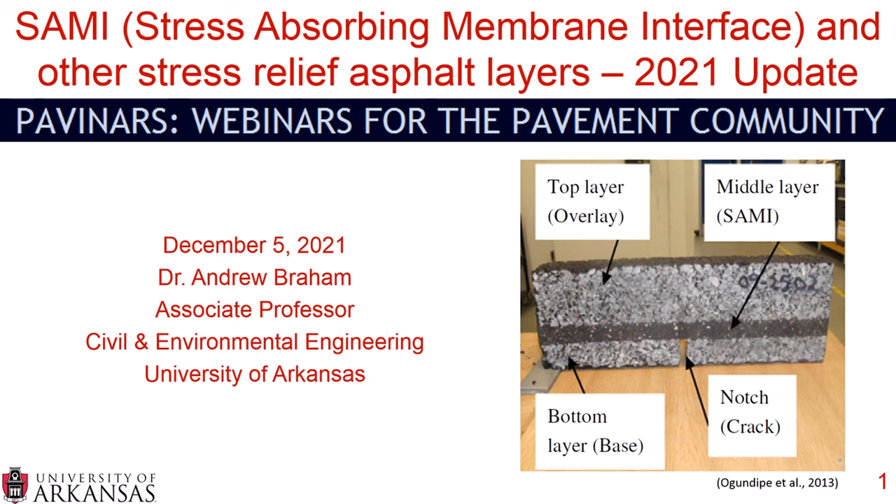My name is Andrew Braham, and today we're going to talk about SAMI, or Stress Absorbing Membrane Interfaces, and Other Stress Relief Asphalt Layers. This is the 2021 update. The original SAMI Pavinar was held and recorded on October 1st, 2013, and posted on YouTube on September 6th, 2018. It currently has over 1,000 views, so an update is warranted.

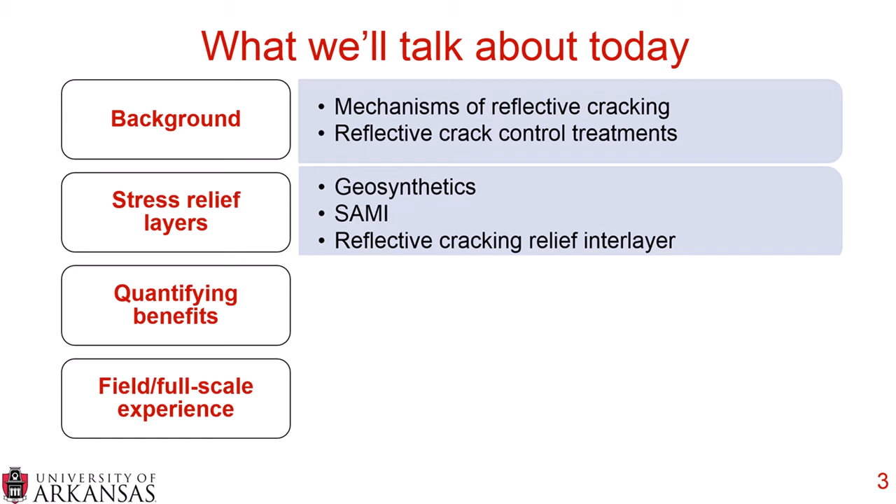Today we'll cover the background of SAMI and other stress relief interlayers, including mechanisms of reflective cracking and basic introductions to reflective crack control treatments. We'll dive deeper into different types of stress relief layers, including geosynthetics, SAMIs, and reflective cracking relief interlayers. We'll spend time quantifying the benefits of these stress relief asphalt layers, and hone in on a Louisiana report that dug deep into predicted service life and an economic analysis of various stress relief layers.

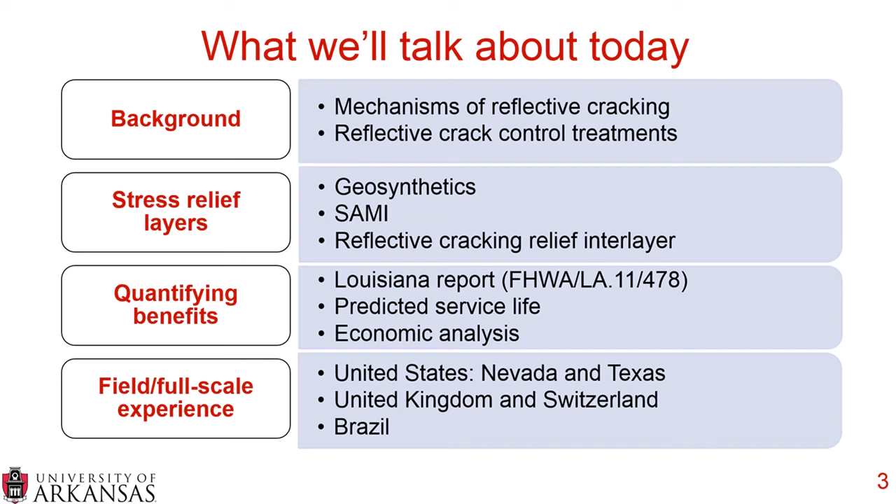Then finally, we're going to end with some field and full-scale experiences. We'll look at two case studies in the United States, one from Nevada and one from Texas. We'll look at two case studies from Europe, one from the United Kingdom and one from Switzerland. And then we'll look at some work that's been done in Brazil.

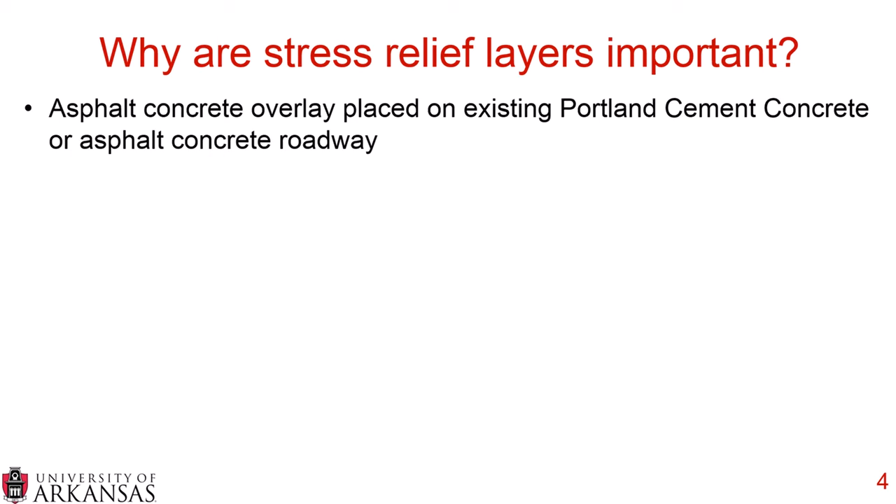So let's start by asking the question: why are stress relief layers important? Well, when an asphalt concrete overlay is placed on an existing Portland cement concrete pavement or an asphalt concrete roadway, there is a possibility for reflective cracking. And that's because the existing pavement often has either cracks or joints in it.

You can see here this picture from Eshan Dave, taken at the University of Illinois. You can see a Portland cement concrete pavement with a joint in the middle, and an asphalt concrete overlay was placed on top. There's a possibility that joint will cause a reflective crack to form, and these cracks reflect into the new overlay.

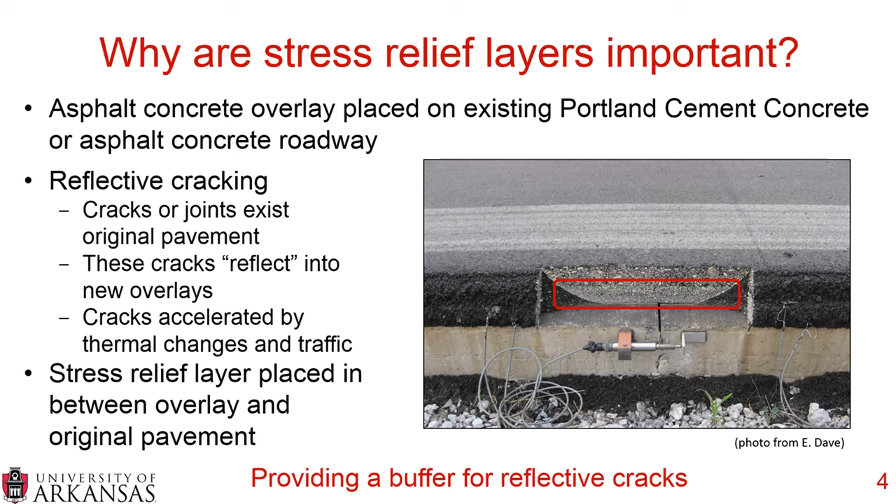So that existing joint, when wheel loads go over it and when there are thermal changes, will start moving up into the asphalt overlay, and eventually you'll have a crack on top of where that existing joint is. In this picture, you can also see in the red box a different type of asphalt concrete mixture. That's because this is a stress relief layer placed between the overlay and the original pavement, with the asphalt concrete overlay on top. This stress relief interlayer provides a buffer for reflective cracks.

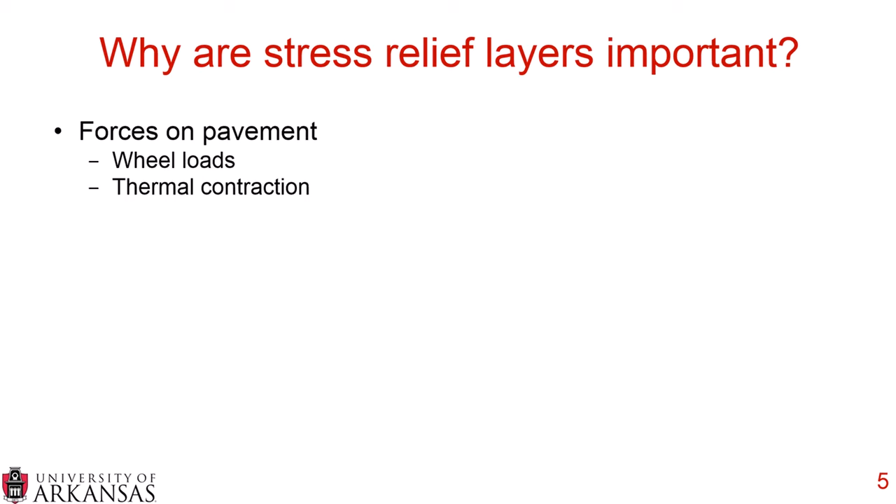So when we focus on the pavement specifically, we can zone in and think about how wheel loads and thermal contraction influence these cracks. As a wheel goes over a pavement, there are bending and shear stresses that occur. There is also a thermal contraction that causes a tensile-type failure. You can see by these arrows, the thermal contractions cause the pavement to want to open because the pavement shrinks, and the wheel loads cause the pavement to go up and down, causing bending and shear stresses.

There's also some vertical movement due to thermal contraction and some horizontal movement due to wheel loads, but in general this is the simplified story of what's going on under loads.

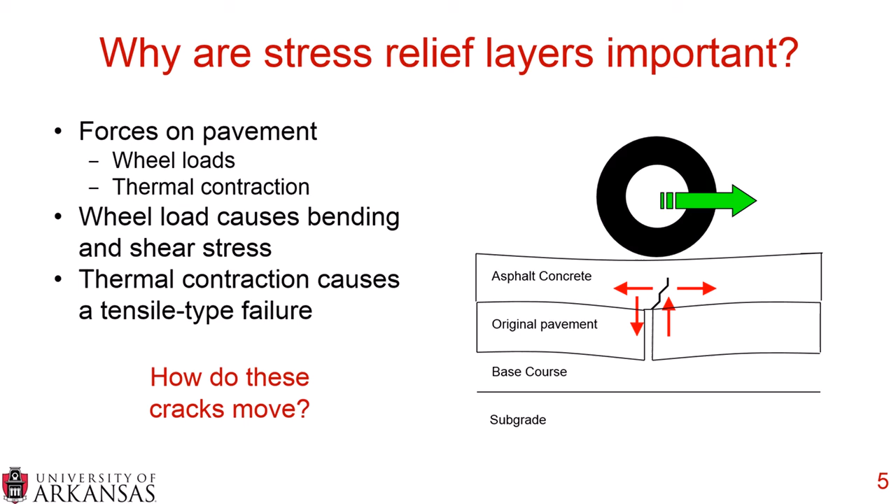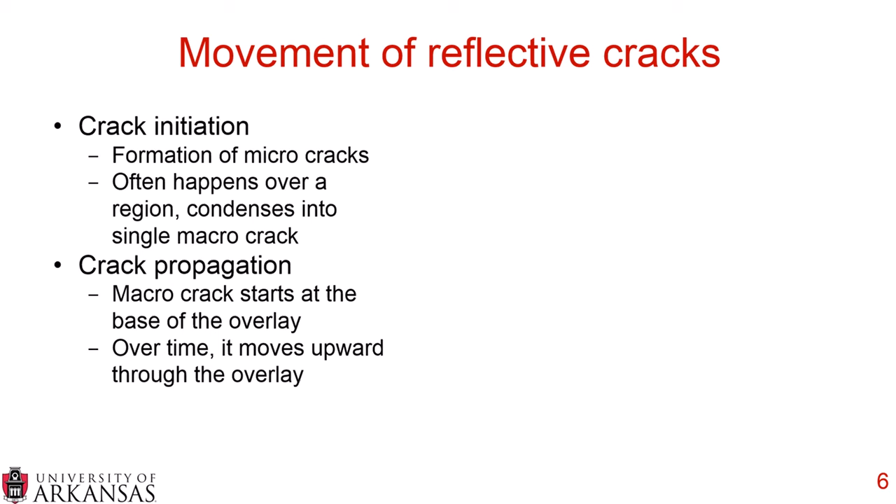It's important to understand how these cracks reflecting through the asphalt concrete layer move. It starts with crack initiation, which is the formation of microcracks. When we think about microcracks, we want to think about a region—there are many microcracks over a region, and over time these condense into a single macro crack. Once you have that macro crack, you start propagating it. The macro crack starts at the base of the overlay in reflective cracking, and over time it moves upward through the overlay.

Now there are various experiments and analysis techniques that dig into this concept of crack initiation, crack propagation, and crack movement. This includes Paris's law, pseudo work, fracture energy, tensile strength energy, strain energy release rate, flexibility index, cohesive softening, and power release rate.

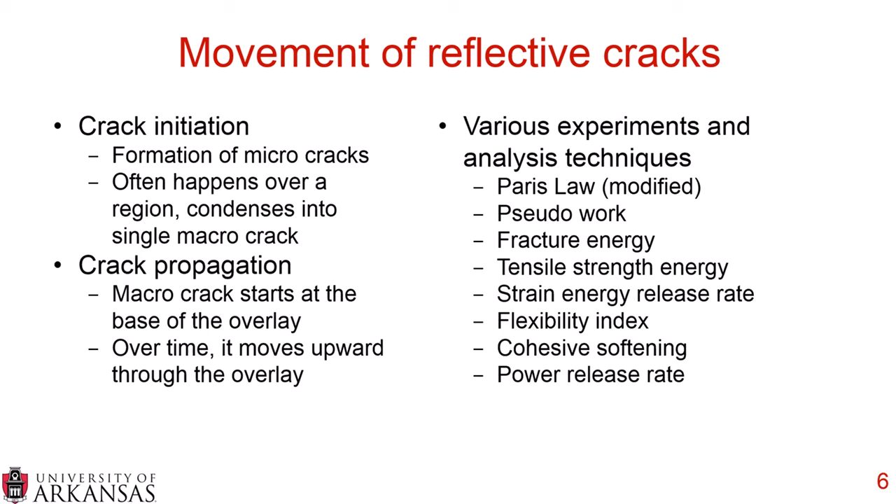The details behind these various experiments and analysis techniques are beyond the scope of this webinar, but if you're interested in these concepts, I encourage you to take a look at a white paper called 'Fatigue or Not Fatigue, That Is the Question.' If you search for this on ResearchGate, it is available for download free of charge.

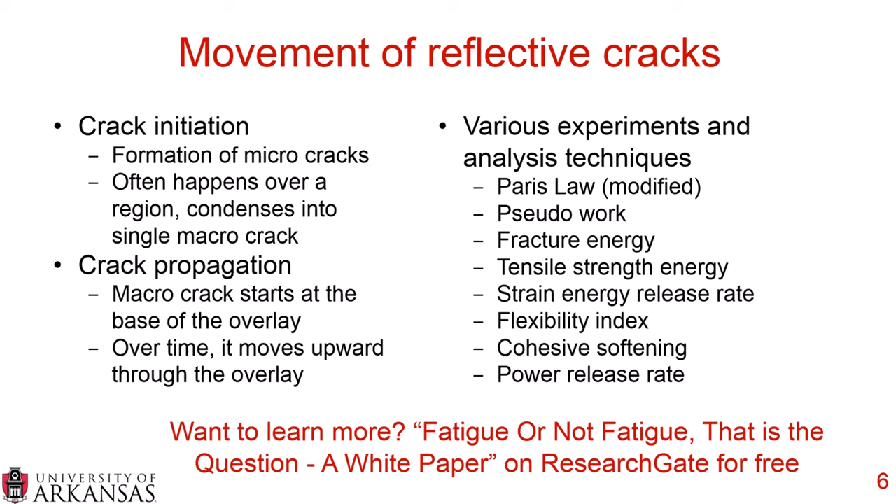Now, what sort of ways have we developed to try and either eliminate or at least slow down the movement of these reflective cracks? Well, we have geosynthetics, which are thin, flexible sheets of synthetic polymer. They can be polypropylene, fiberglass, or nylon. You have either woven or non-woven varieties, including a fiberglass mesh and a non-woven matrix, about a half inch by half inch wide. So you can have either a woven mat or a mesh type configuration with geosynthetics.

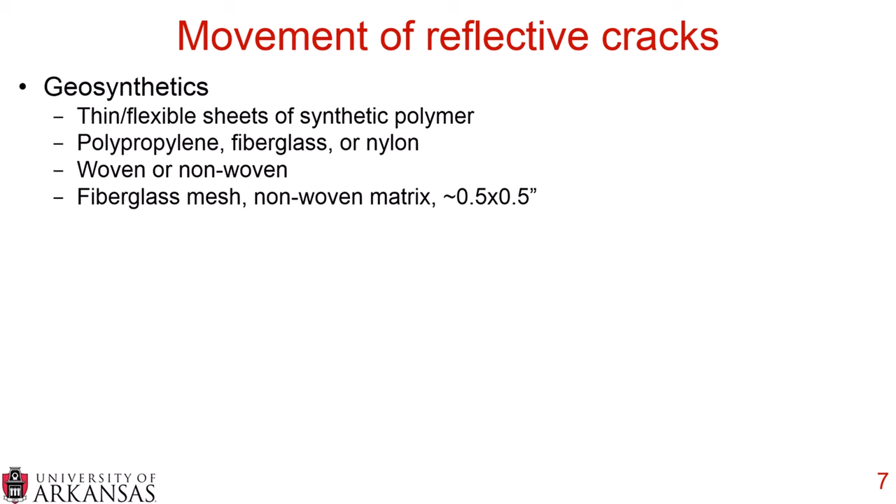Stress absorbing membrane interfaces, or SAMIs, are usually either asphalt emulsion or hot applied asphalt binder placed on the road, and you can potentially modify the asphalt binder with SBS, styrene butadiene styrene, ground tire rubber, or other modification techniques. You may use fiber between the layers of asphalt emulsion or hot applied asphalt binder, and you place coarse aggregate chips on top.

A reflective cracking relief interlayer can be fine graded asphalt concrete, which can be modified with polymer if desired. There are different names for these interlayers. Some articles use the term SAMI, which I believe is not quite technically correct, but you'll also see crack attenuating mixtures, stress relief asphalt mixtures, and a proprietary product developed years ago called Strata. These are all types of reflective crack relief interlayers. But remember, all of these materials - geosynthetics, SAMIs, and reflective crack relief interlayers - are designed to be placed on top of an existing pavement and underneath an overlay in order to eliminate or slow down reflective cracking. The next section will dive deeper into these treatments. This is just a very brief overview.

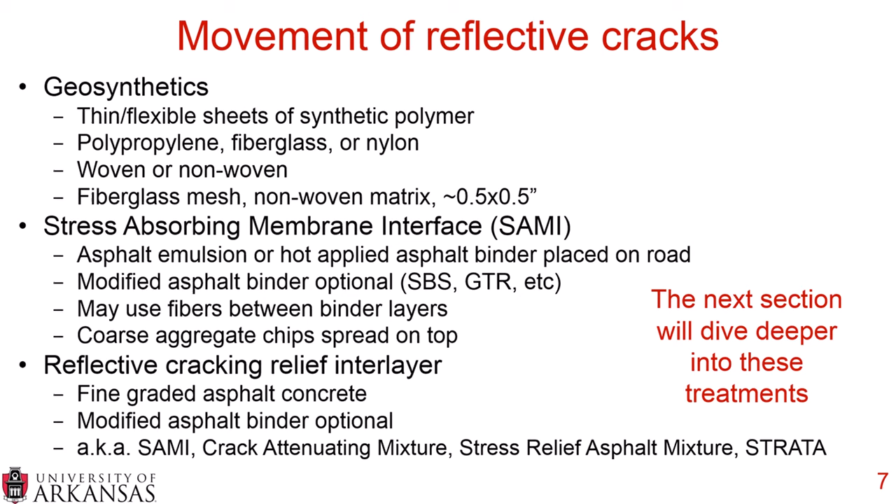So let's move on to digging deeper into each type of stress relief layer, and let's start with geosynthetics.

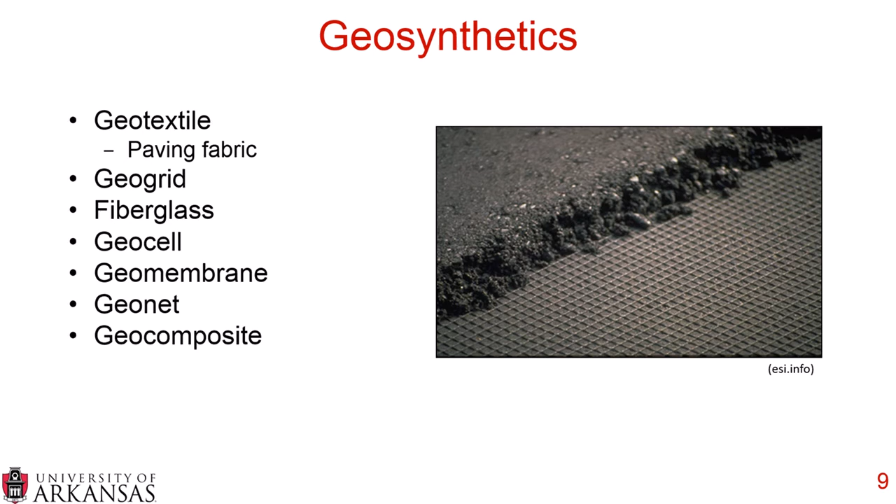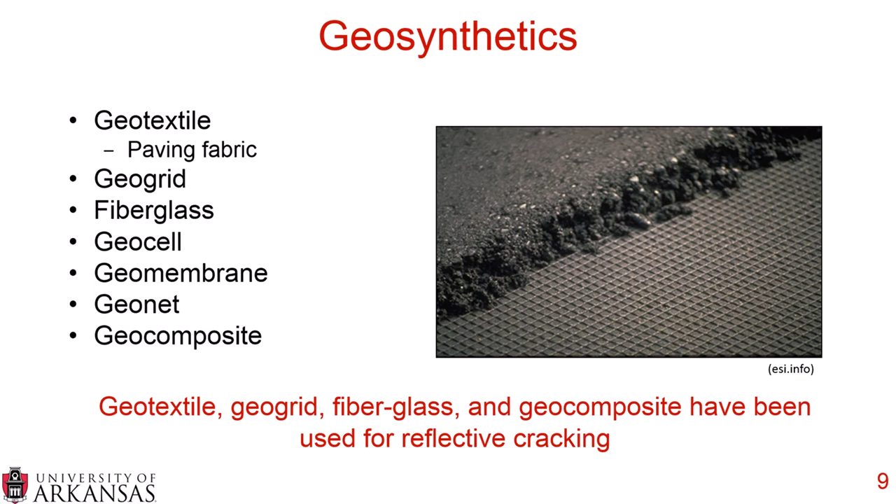Geosynthetics can be geotextiles, which is a paving fabric. It can be geogrids, which you can see on the right. You can also have fiberglass material or geocells. You have geomembranes, geonets, and geocomposites. So there's a whole bunch of different types of geosynthetics out there. And when we think specifically of pavements, geotextiles, geogrids, fiberglass, and geocomposites have been used for reflective cracking, so as you're reviewing literature you'll probably see these types mentioned.

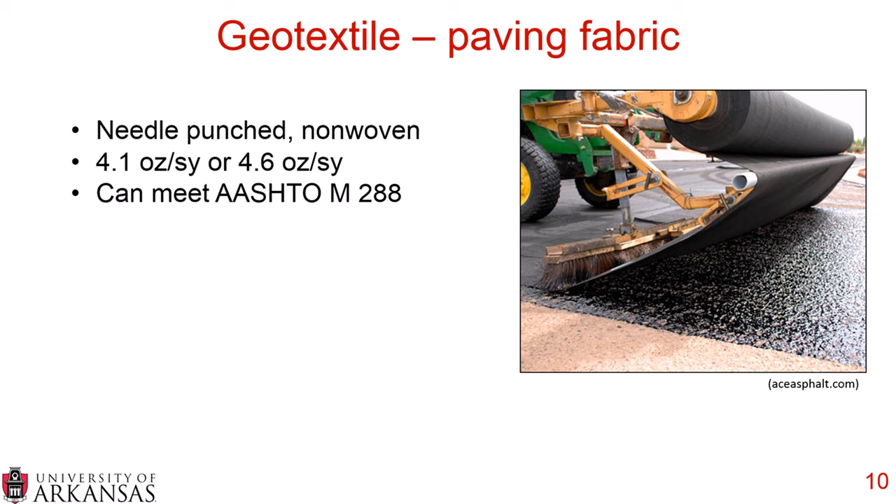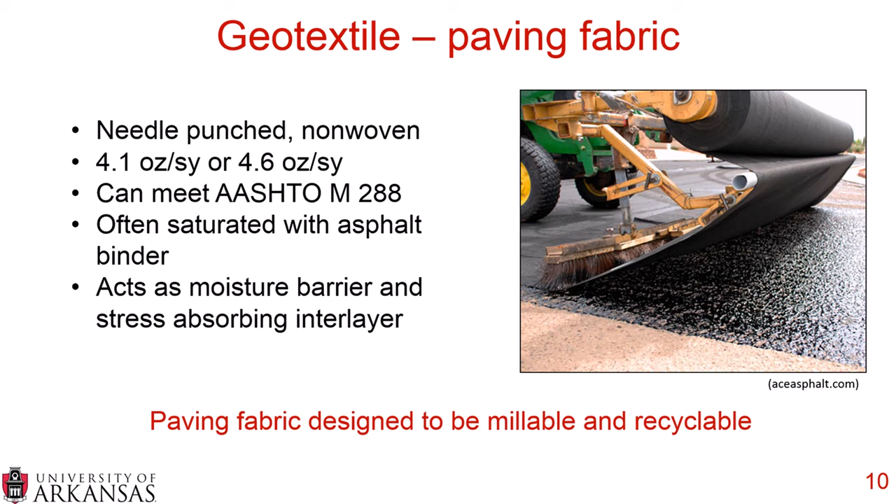For example, for paving fabrics, this is needle punched and non-woven. It's 4.1 ounces per square yard or 4.6 ounces per square yard, depending on the thickness of the fabric you're laying, and you want it to meet AASHTO M288. You can see here it's being placed on an asphalt binder, and it's often saturated with asphalt binder. This not only allows it to be a stress absorbing interlayer, but with this absorption it can also act as a moisture barrier. Now, one common question about this material is, can you mill it later, and can it be recycled into future mixes as reclaimed asphalt pavement? There are paving fabrics specifically designed to be millable and recyclable, but that is something you definitely want to investigate before placing any particular brand.

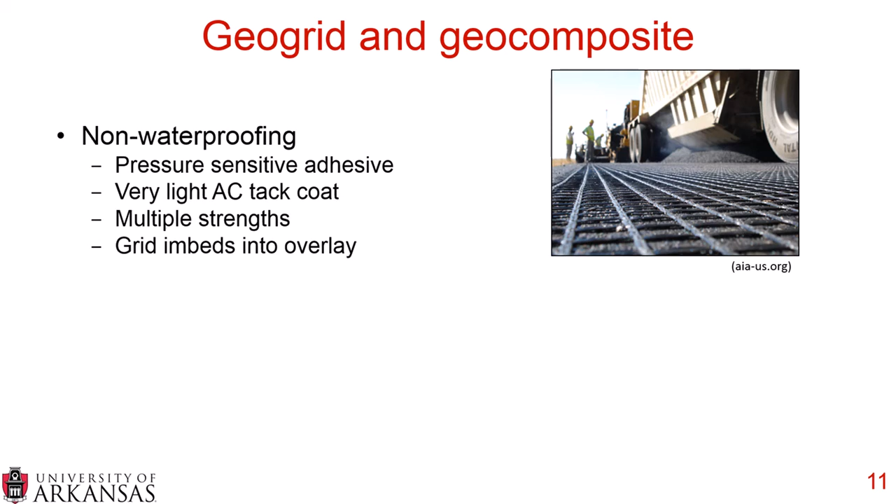Now, moving to geogrids and geocomposites, these are no longer a fabric - this is more of a grid type material. These are non-waterproofing, because they just use a pressure-sensitive adhesive and a very light asphalt concrete or asphalt cement tack coat. You can have multiple strengths of geogrids and geocomposites, and the grid embeds into the overlay. So you can see in this picture, you're placing hot mix asphalt on top of the geogrid, and that hot mix asphalt will go down into those cells and embed itself into the geogrid. So those are all non-waterproofing options.

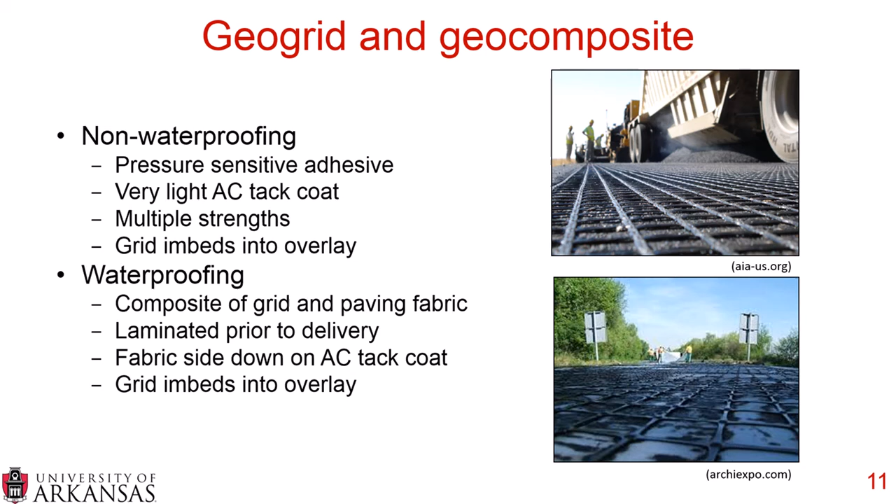For waterproofing options, you can have a composite of a grid and a paving fabric, generally laminated prior to delivery. You want to make sure to place the fabric side down on the asphalt cement tack coat, and then the grid again embeds itself into an overlay. So you can imagine this open geogrid and geocomposite really isn't waterproof because it has these large cells in it. So if you do want the waterproofing benefits, you want to make sure to use a paving fabric in addition to the geogrid.

Now, SAMIs, stress absorbing membrane interfaces - you generally place some sort of seal coat binder down, and this is generally polymer modified. As I mentioned, this can be hot applied asphalt binder or asphalt emulsion. You can use ground tire rubber, you can use SBS polymer, and you can also place fibers in between binder layers. So you can put a thinner layer of either hot applied asphalt binder or asphalt emulsion down, then place some fiber, and then place another layer of asphalt binder or asphalt emulsion. There's various ways to modify the seal coat binder. You then place your coarse aggregate chips, and essentially this turns into a chip seal.

You put a pneumatic tire roller over it, orient the particles, sweep it, and let it sit for probably about a week to make sure all the water has left the system. Then you place your overlay. These SAMIs retard crack propagation and also improve the tensile strength at the bottom of the overlay.

Earlier I mentioned that you can have horizontal stresses at the bottom of a pavement layer due to wheel loads, and that is because of a bending stress. Those bending stresses create tensile stresses at the bottom of your layer, and these SAMIs can help improve that tensile strength because it's a very rich layer.

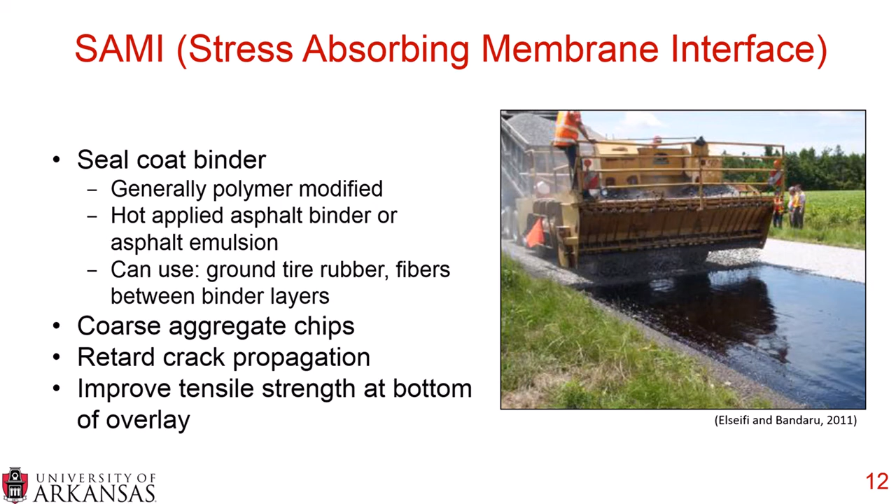Finally, the third type is a reflective cracking relief interlayer. This is a dense, fine aggregate mixture layer that may or may not be polymer modified. It's placed on top of a deteriorated pavement, and then you place your hot mix asphalt overlay. It protects the pavement structure from moisture damage and delays reflective cracking. When we say fine aggregate mixture, we usually mean greater than 98% passing the 3/8 sieve, which is the 9.5 millimeter sieve — so almost a sand mixture, but very fine.

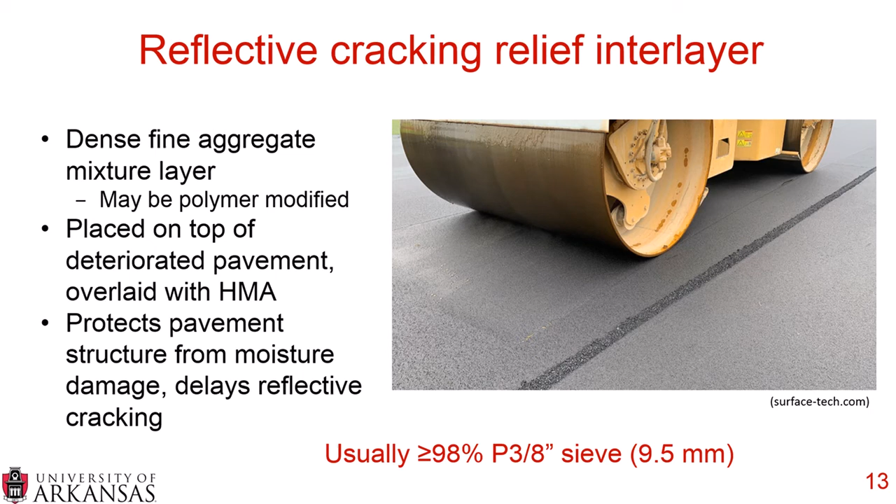Now that we've had a pretty in-depth introduction to the stress relief layers, we're going to go over some of the benefits, starting with a very nice study from Louisiana.

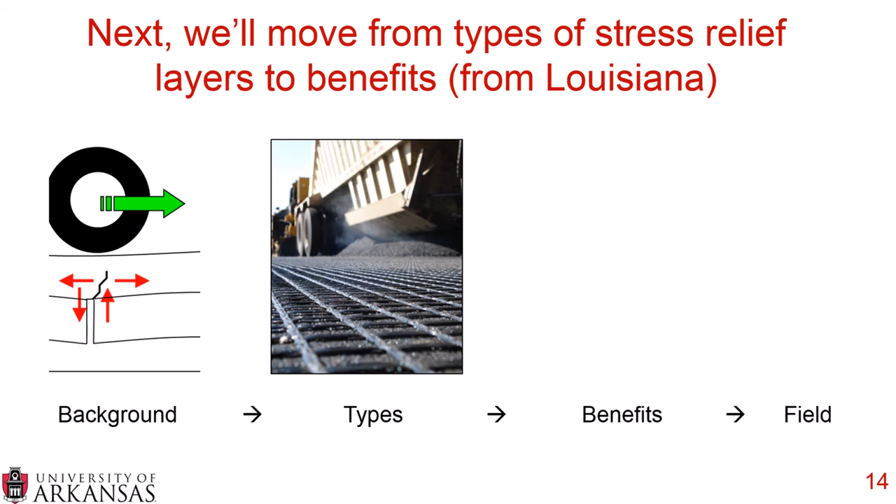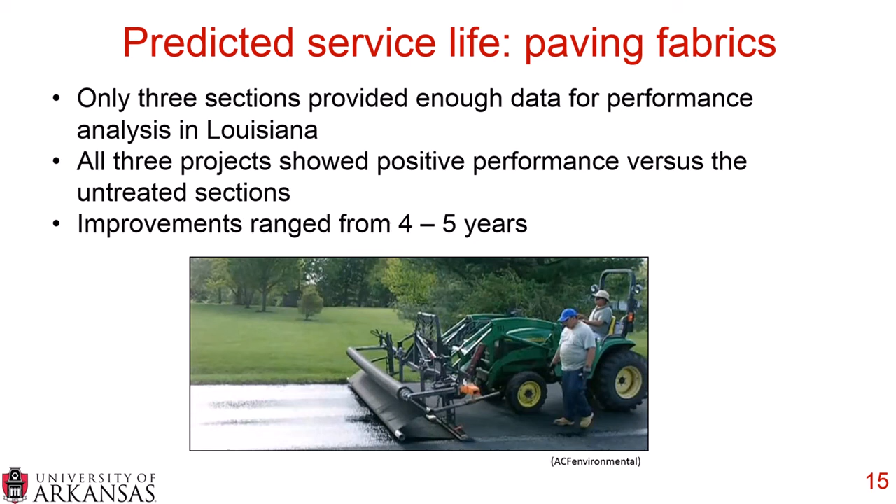They first looked at paving fabrics, and when predicting the service life of various paving fabrics, they looked at 3 sections, because only 3 sections provided enough data for performance analysis in this Louisiana study. They found that all 3 projects showed positive performance versus the untreated sections, with improvements ranging from delaying reflective cracking anywhere from 4 to 5 years.

They also looked at fiberglass grids, placed in 2 different configurations. One was a complete road system, where you place the fiberglass grid across the entire existing pavement surface area, covering all of the existing pavement. You can also place this only in specific locations, called a strip application, where you just place the grid over where cracks exist in the existing pavement.

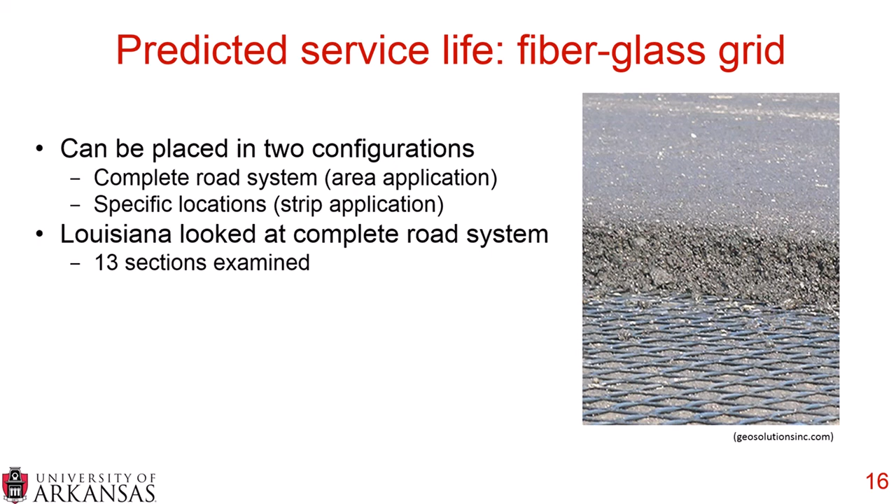The Louisiana study only looked at the complete road system, examining 13 different sections. They found that 8 of those 13 sections showed the untreated section outperforming the treated section anywhere from 0 to 7 years, and 5 sections showed the grid outperforming the untreated section by 1 to 6 years. So some untreated sections outperformed the grid section by up to 7 years, while some grid sections outperformed untreated sections by up to 6 years, and some showed no difference — a pretty big mixed bag.

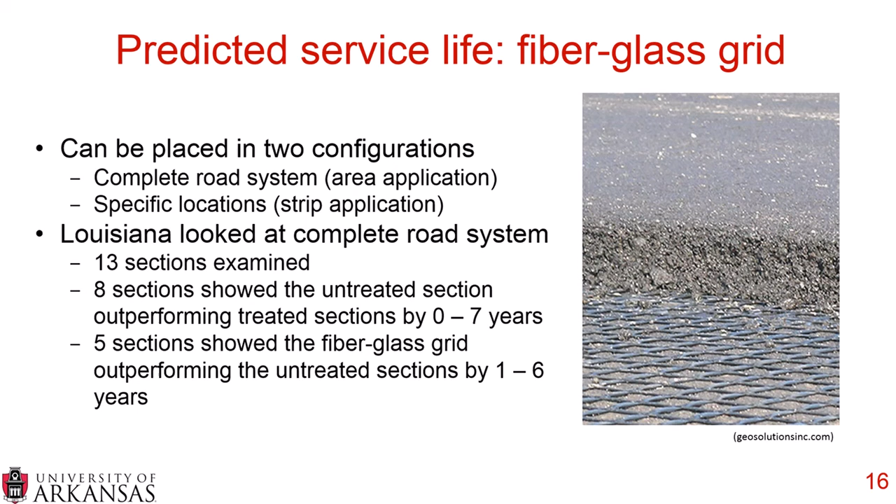So this is really a mixed study, and if you're interested in fiberglass grids, I really encourage you to take a look at this report because there's a lot of interesting details and discussion about this in particular.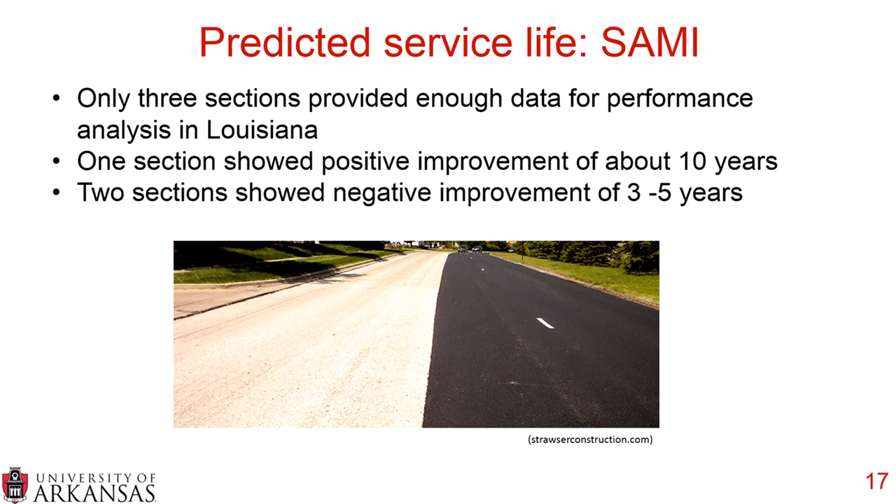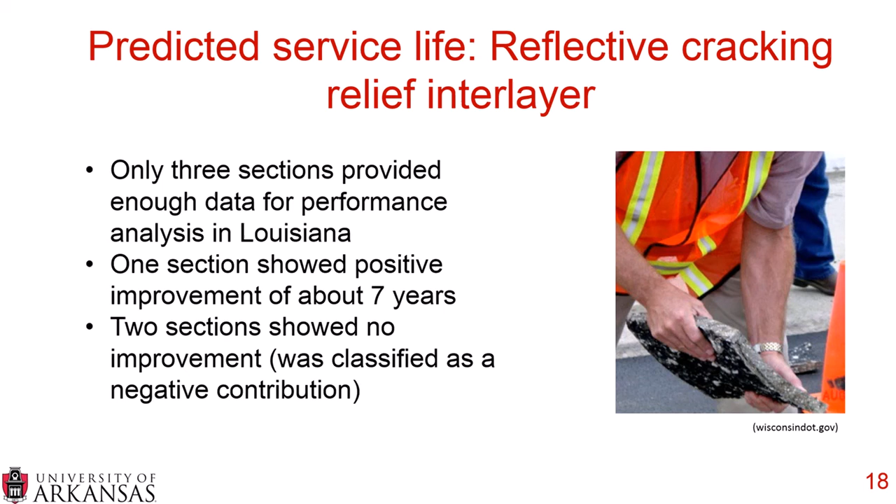Then finally, they looked at 3 sections of reflective cracking relief interlayers. One section showed a positive improvement of about 7 years, and 2 sections showed no improvement. In the report, they actually classified this as a negative contribution because it costs a little more money, and if there's no improvement, then it's not a positive contribution.

After going through all that performance analysis, they did a very comprehensive economic analysis. They found that for paving fabrics, costs increased anywhere from 2 to 13% of the project cost, accounting for approximately 8% of the hot mix asphalt overlay cost on average.

The fiberglass grids increased cost anywhere from 2 to 128%, accounting on average for 48% of the overlay cost. The SAMIs increased cost anywhere from 8 to 23%, accounting for approximately 14% of the HMA overlay cost on average.

The reflective cracking interlayer increased cost anywhere from 25 to 58%, which is about 39% of the HMA overlay cost on average.

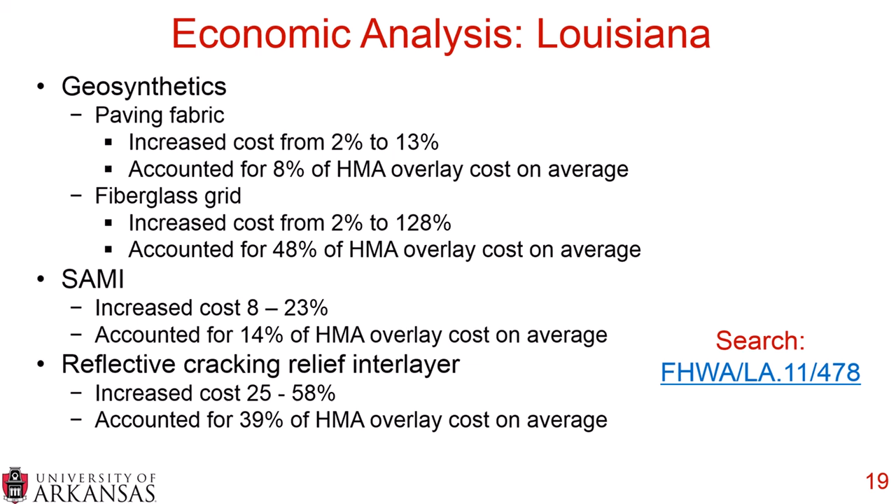This is a very nice study because they looked at both the performance perspective and the cost perspective, which is very difficult to find in one study. If you want to read the report from this Pavinar, I encourage you to search FHWA/LA.11/478. This report is available free of charge to download from Louisiana. Again, a very, very nice study — highly recommended.

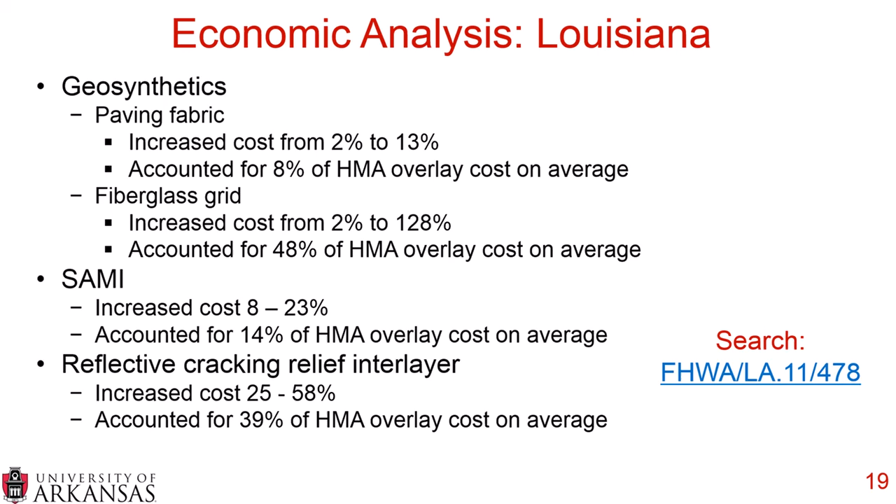Now, finally, we're going to move from the benefits to some field and full-scale experiments that I was able to find. Let's start with Nevada.

In the state of Nevada, they looked at 3 field sections. They placed an overlay over an experimental stress relief course, or ESRC, then a 2-inch overlay and a 3/4-inch open graded friction course, or OGFC. They also placed the traditional Nevada reflective crack relief interlayer, Nevada DOT SRC-T3, plus the overlay and OGFC. Then they did a control section, simply a 3-inch overlay and a 3/4-inch OGFC.

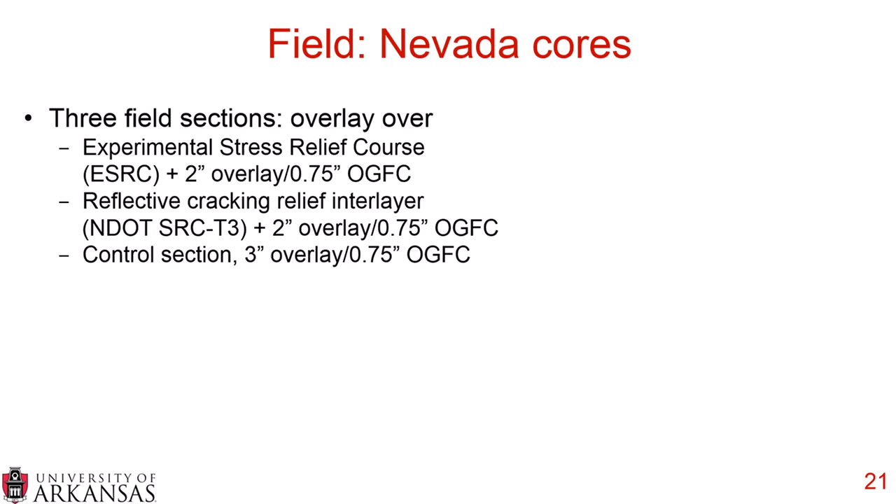So these are the 3 field sections they placed with an overlay, and then they took cores from these field sections. You can see here a picture of the OGFC, which was on all the sections, a picture of the SRCT3, the Nevada DOT reflective cracking relief interlayer. They looked at the control section, the T2C, and then the ESRC. Some very nice images there of the cores that were taken.

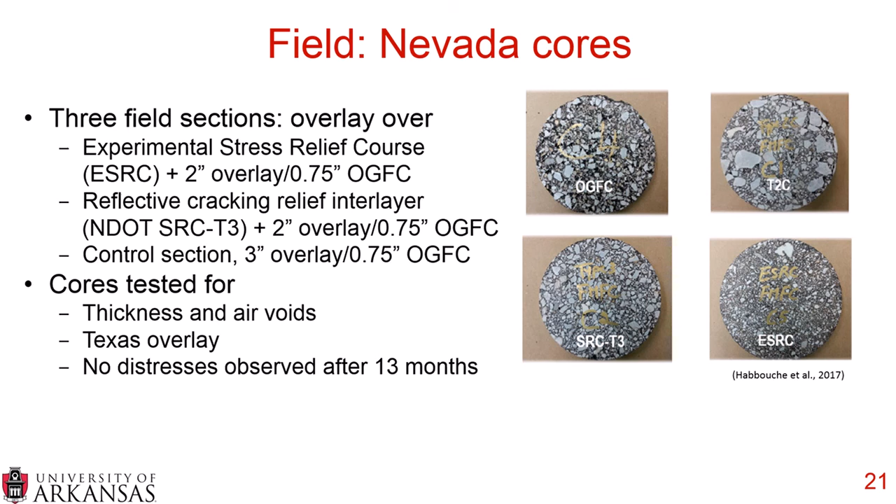The cores were tested for thickness and air voids, and tested on the Texas overlay tester. From a field perspective, they found no distresses observed on any of the sections over 13 months. If you want more information, take a look at this journal article, Habbouche et al., titled Reflective Cracking Relief Interlayer for Asphalt Pavement Rehabilitation from Development to Demonstration, in Road Materials and Pavement Design, RMPD, in 2017.

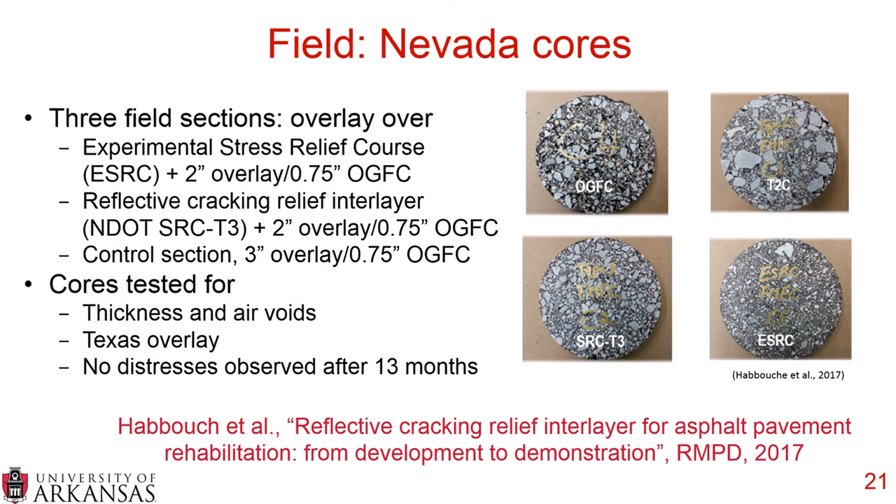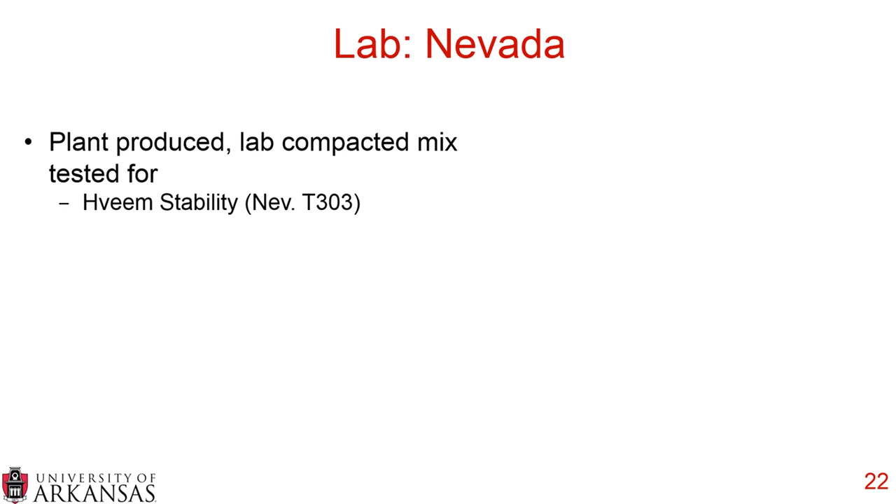So the first half of this study looked at the cores and examined the field section, and the other section went to the lab. They used plant-produced lab compacted mix and tested for Hveem stability according to Nevada T303.

They looked at dynamic modulus in the AMPT—when they wrote this paper it was AASHTO TP79, but now it's AASHTO T378. They tested flexural beam fatigue, AASHTO T321. They tested the overlay test in the AMPT following Texas 248F, and also quantified rutting via a repeated load triaxial test.

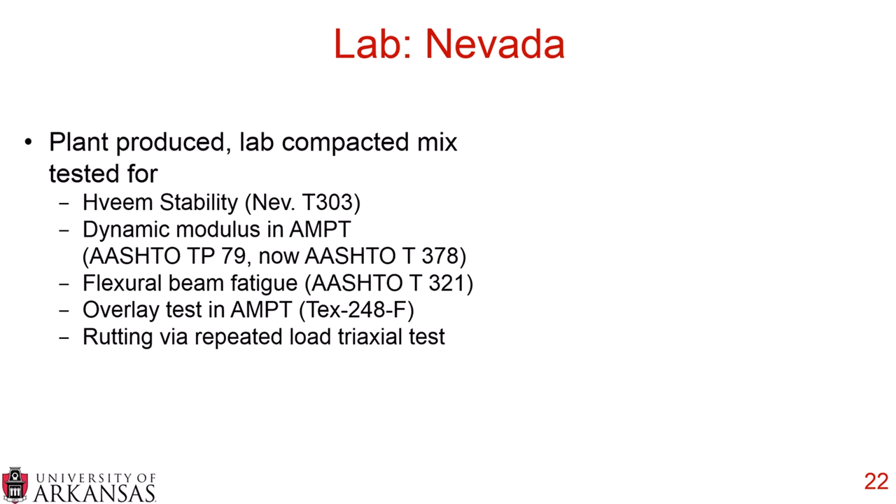You can see here a picture of the overlay test in the AMPT, where you have fixed steel plates with aluminum plates and then movable steel plates. The sample is glued to the face of that, and you pull on it in the AMPT. In short, they found that the ESRC performed equal or better than the SRC T3 in all of these lab tests. I encourage you to take a look at the paper for all of the details.

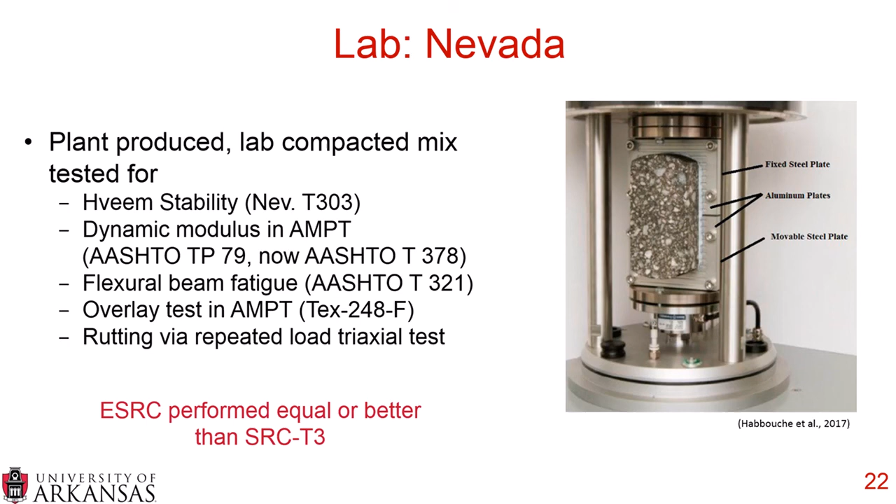Now in Texas, they have developed the Crack Attenuating Mixture, or CAM, intended to reduce reflective cracking. Here's a nice picture provided by Tom Scullion, and on the left-hand lane you can see this CAM mixture. The general properties are a binder content at a minimum of 7%, usually placed at 8%.

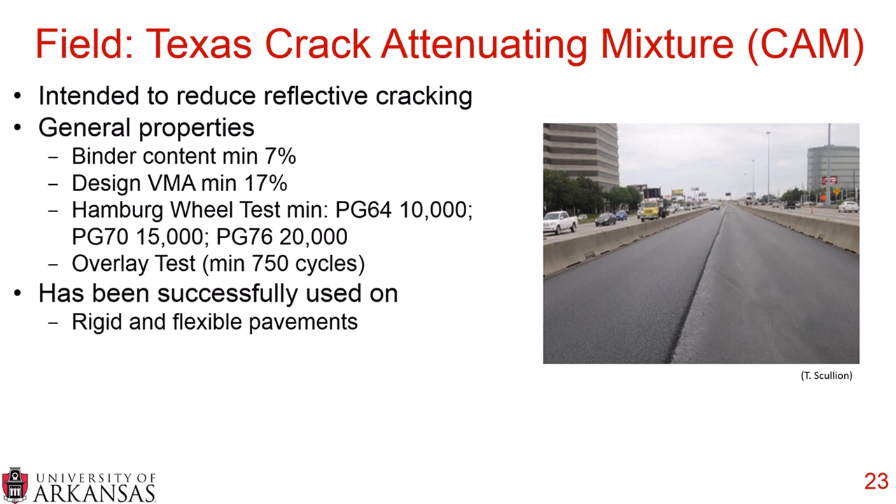The design VMA is a minimum of 17%. There are various Hamburg wheel test minimums based on the PG binder grade: a PG 64 high temperature grade requires a minimum of 10,000 cycles, a PG 70 requires a minimum of 15,000 cycles, and a PG 76 requires a minimum of 20,000 cycles. The overlay test must pass a minimum of 750 cycles, and this has been highly successful on both rigid and flexible pavements.

It's been placed on interstates, state highways, and farm-to-market roads, and has motivated other states to develop similar mixtures—like you saw in the previous Nevada study with their special interlayer mixture. Texas really led the way in developing this mixture, and they have various reports available online. Just search Texas Crack Attenuating Mixture; Texas has all their state reports online, a very nice resource. You can also take a look at TxDOT Special Specification 3000, which covers all the details for the Crack Attenuating Mixture specification.

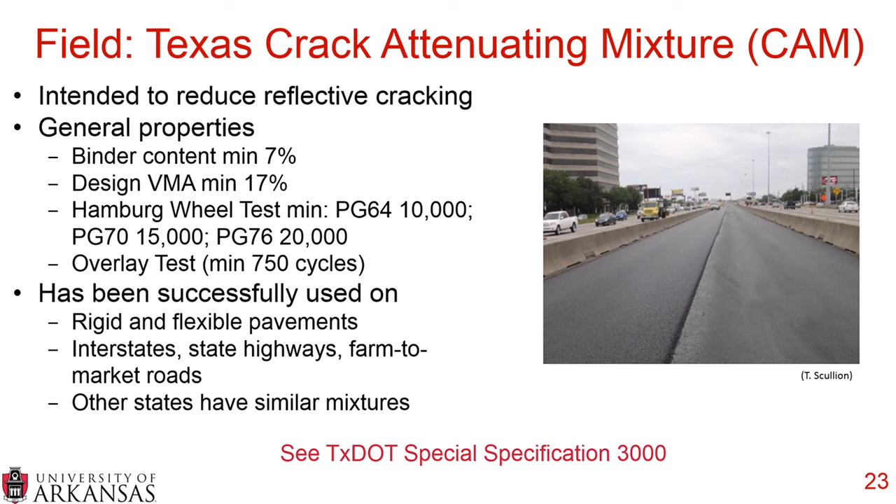Now moving over to the United Kingdom, they used a medium scale wheel tracking machine. You can see an image on the right where a wheel runs over a sample and deflections are measured with an LVDT. The beam is placed on a rubber mat, and they tested at 3 temperatures: 10, 20, and 30 degrees Celsius. The materials used ranged from a 40 to 80 millimeter overlay.

The 80 millimeter overlay was the control, so there was no interlayer. They used 3 different configurations of interlayers: no interlayer at 80 millimeters, then 20 to 30 millimeters of SAMI using 2 proprietary mixtures, compared to 20 to 30 millimeters of sand asphalt. When they had those 20 to 30 millimeter thicknesses of interlayer, they then had a thinner overlay, and a 10 millimeter base layer. This is what had the existing flaw in it in order to try and quantify the reflective cracking.

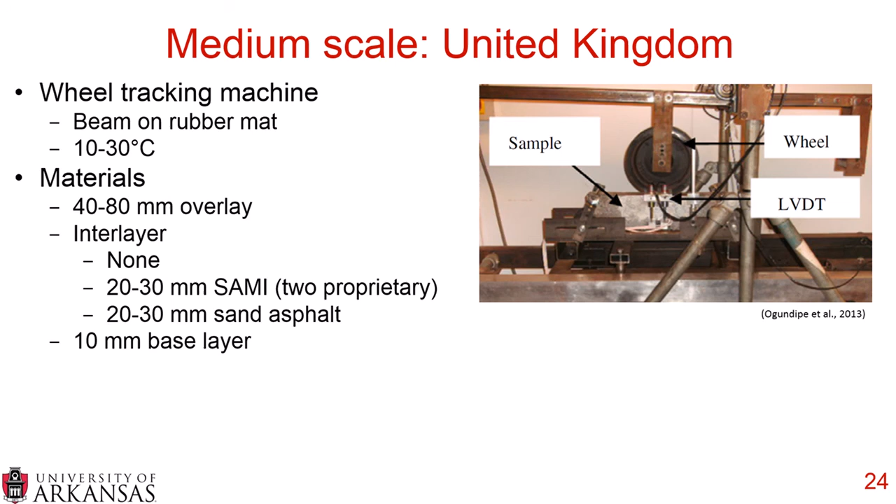They found that the 2 SAMI mixtures retarded reflective cracking at the higher temperatures. In fact, they found that it was optimized at 20 degrees Celsius. It did retard at 30 degrees Celsius, but they didn't see any benefits at 10 degrees Celsius. They also found that it was actually more effective in thinner lifts, which is interesting.

So when they had a thicker lift, that actually did not retard the reflective cracking as well. They also found that these mixtures increased deflection, so it's kind of a trade-off—you are retarding reflective cracking, but there is a little bit of increase in deflection. You can find all the details in this paper, Ogundipe, Investigation of Crack Resistance Potential of Stress Absorbing Membrane Interlayers, or SAMIs, under traffic loading.

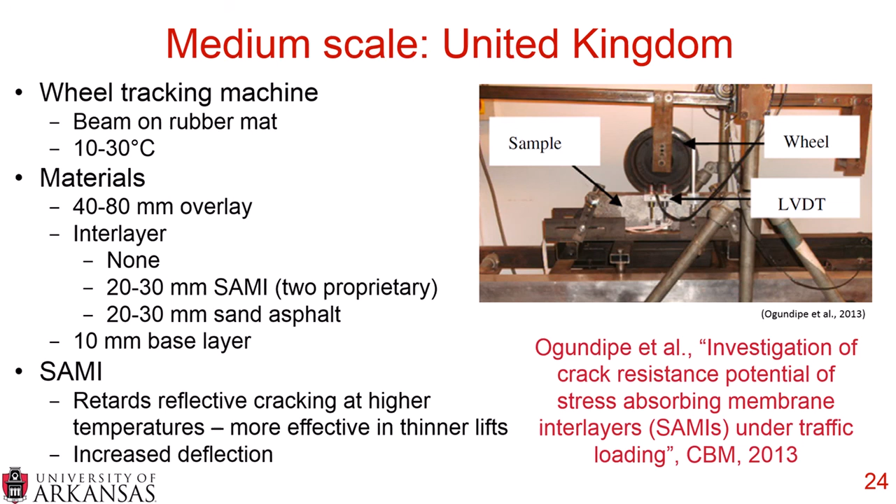Now, moving over to Switzerland, they used different SAMI mixtures on an accelerated pavement test. They used an MLS 10, which applied 5,000 loads per hour at 65 kilonewtons. This is a very interesting study—I enjoyed reading this paper tremendously.

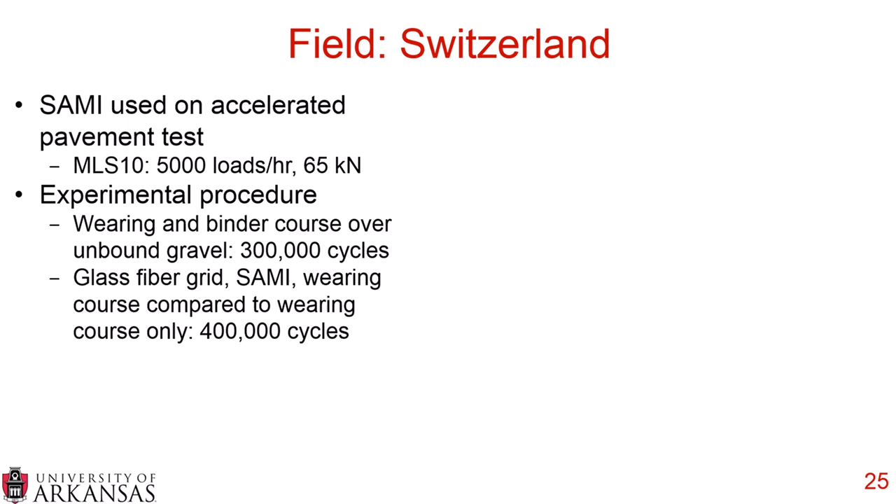They placed a wearing and a binder course over unbound gravel, and applied 300,000 cycles of the MLS 10 to that pavement. Then they placed a glass fiber grid, SAMI, and a wearing course onto that existing deteriorated pavement and applied 400,000 cycles. So they deteriorated a pavement in the lab, then placed this glass fiber grid and SAMI combination and saw what it did after that was placed.

This can be found, all the details can be found in Arraigada et al., Influence of SAMI on the Performance of Reinforcement Grids, which is published by Rilem in 2016.

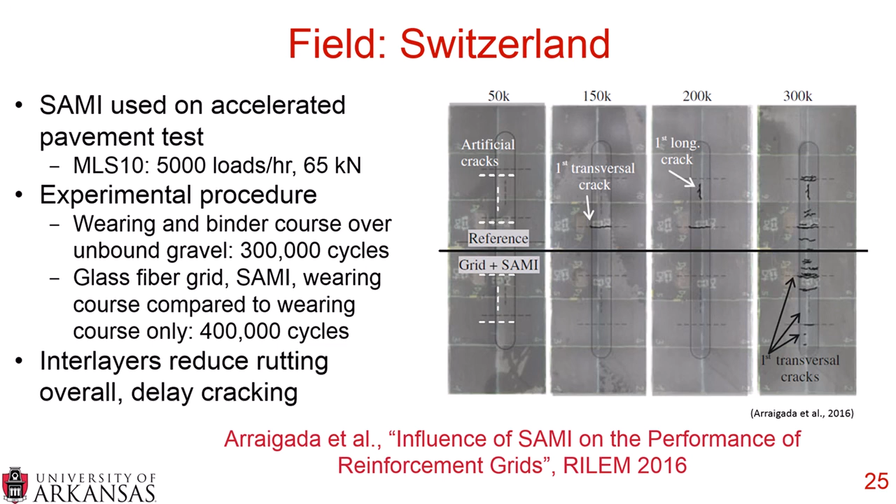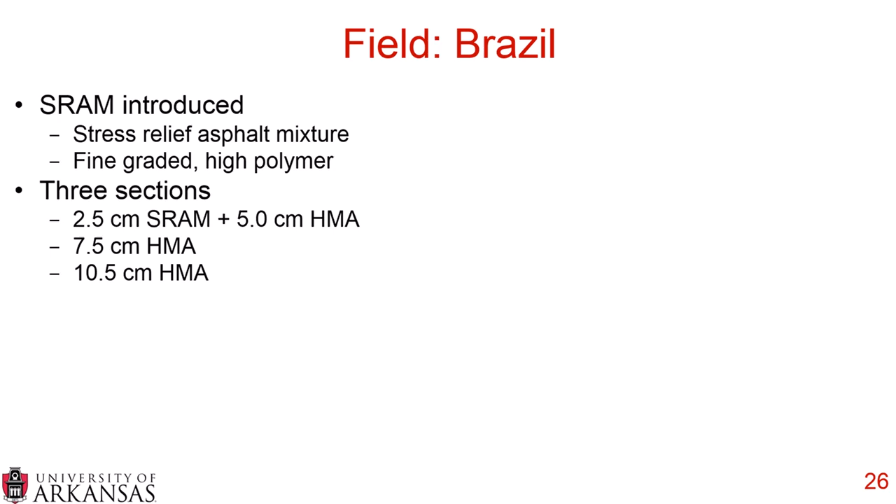Finally, moving to Brazil, they did a very nice field experiment where they looked at SRAM—this stands for stress relief asphalt mixture, or SRAM, and it's a fine graded high polymer mixture. They placed 3 sections in the field: 2.5 centimeters of SRAM plus 5 centimeters of HMA, compared to 7.5 centimeters of HMA, the same thickness, and also a slightly increased thickness of 10.5 centimeters.

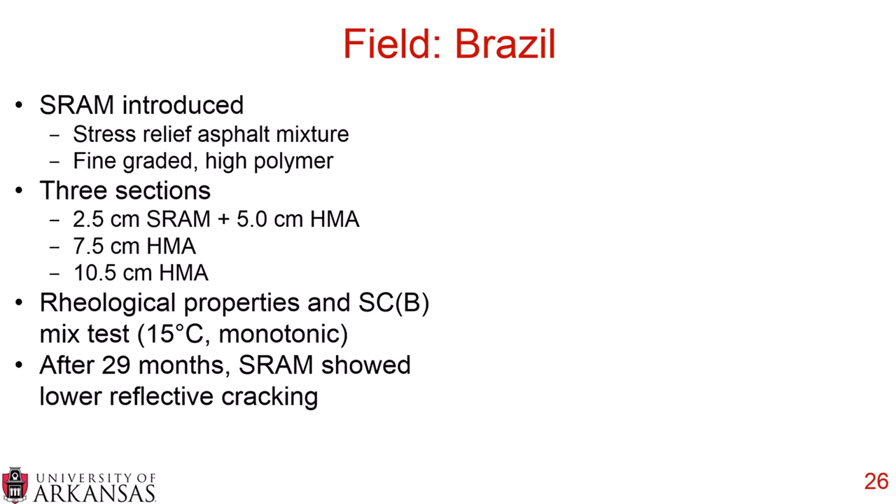In the lab, they ran a whole bunch of rheological property tests, which is very interesting, and they ran the SCB, the semicircular bend mix test, at 15 degrees Celsius in a monotonic fashion. So they did a whole bunch of lab tests, but they also looked at this field, and found that after 29 months, the SRAM showed lower reflective cracking. They actually have a very nice graph here that demonstrated that.

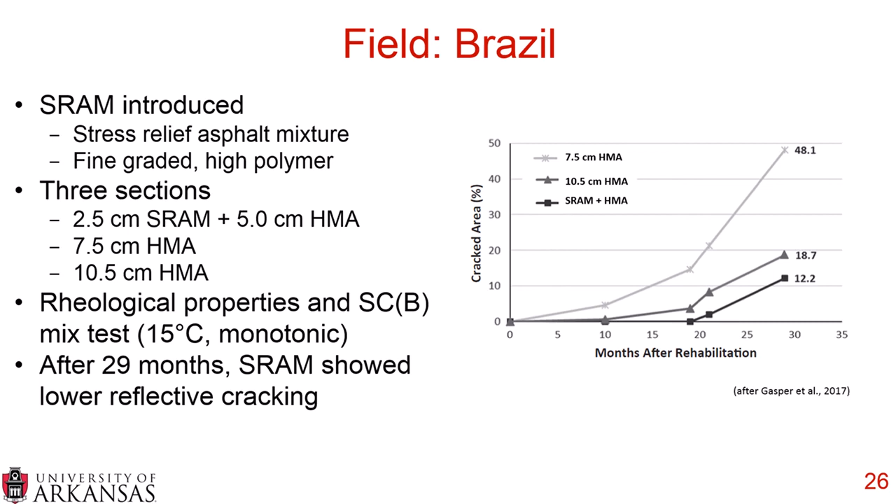You can see the thinnest HMA layer, the 7.5 centimeter, by far shows the highest percentage of cracked area—it got up to 48.1 after 29 months. Whereas the 10.5 centimeter only had 18.7, and the SRAM plus the HMA only had 12.2. So you can quite easily see the impact of the SRAM and how it does reflective crack a little bit, but it's less, and it's certainly delayed over having just a normal overlay or even a thicker overlay.

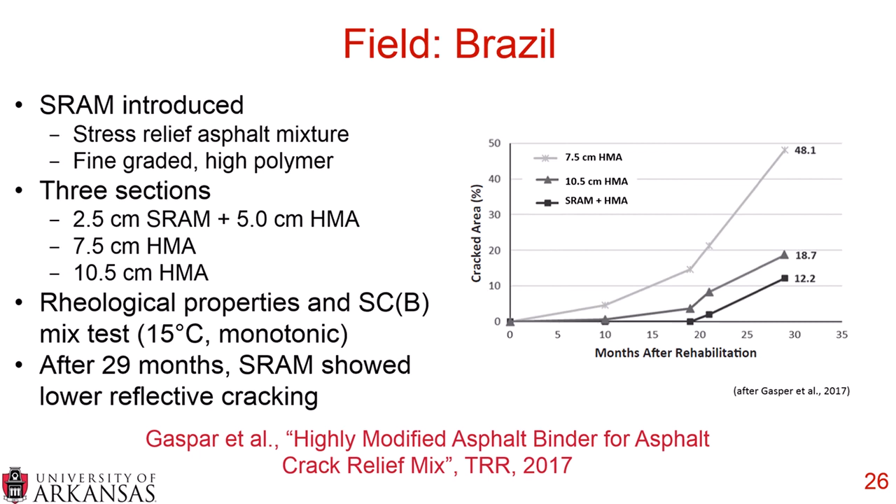You can find much more about this in Gaspar et al. The paper is titled Highly Modified Asphalt Binder for Asphalt Crack Relief Mix, published in Transportation Research Record in 2017. So lots of additional reading if you are so interested.

So in summary, for SAMI and other stress relief interlayers, we went over a background of reflective cracking, we went over the basic types of stress relief asphalt layers, some of the benefits, and then we also looked at multiple field studies and lab studies that tried to quantify some of these benefits.